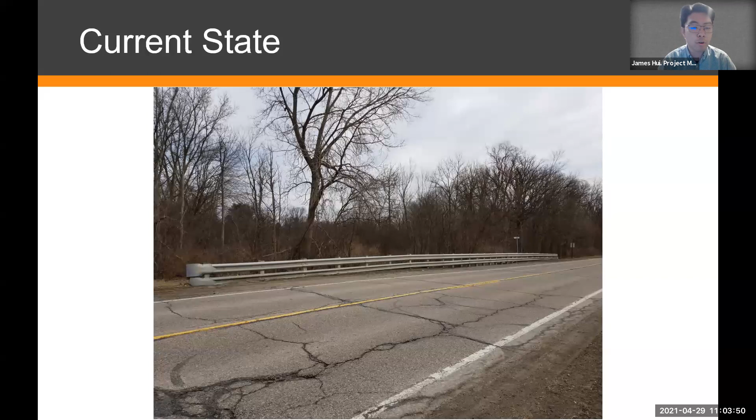Here's a picture of the bridge over Fleming Creek. We will be closing this bridge down for the duration of the project. While we're performing this work, we have some preventative maintenance work that has to be done on the bridge before we pave back over it.

So the plan is to mill and resurface Ford Road between Plymouth Road and M-153. With this resurfacing, the road will be closed, and we'll do minor ditching work to improve drainage. We'll mill the top layer of the existing pavement and pave back about 3.5 inches of asphalt. Our design proposes a 3-foot paved shoulder on each side with 3 feet of gravel.

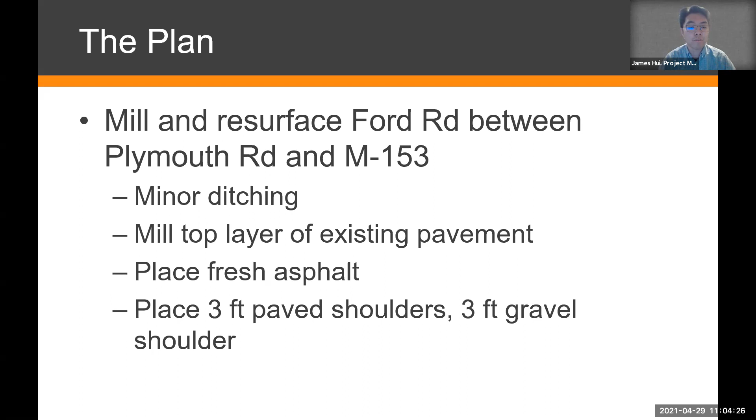There are other improvements we're trying to include during this closure. We're going to trim the tree canopy in the area - we won't be cutting any trees down, but we will limb some branches as time allows. We'll also be doing bridge deck preservation as we mill down to the bridge, installing new guardrail on that bridge, and putting back a fresh new coat of pavement markings on the road once we pave it.

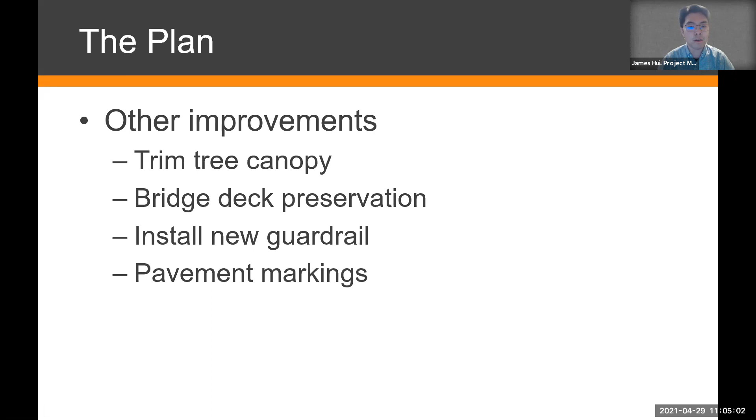I'm sure many of you have seen what milling looks like. Once we're out here, we'll have operations set up to maintain one lane during the milling, so people living in the area will still have access to their property. This is a typical milling machine, and they'll be handling one lane at a time. If you're driving in the area, please watch out for the cones, signs, and workers so everyone stays safe.

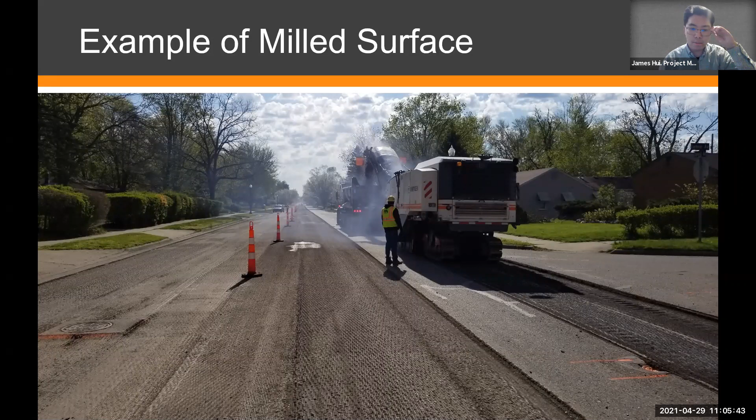Let's talk about our timeline and detour routes. Our contractor is expecting to start this project at the beginning of June. This is tentative because they're currently working on a different project for us, and it depends on when that job ends. Our best estimate is that they'll start June 1st. We'll keep the website updated and send out updates to everyone on our emailing list as the time gets closer.

This road closure is expected to last approximately 2 weeks. This depends on the weather, but we're going to try to hold the contract to 2 weeks at most. Some of this work may be completed under lane restrictions after the road is reopened - once the road is paved and back open, we'll still have pavement marking work, shoulder work, and ditching work that could happen after opening. So just be cautious as you're driving by.

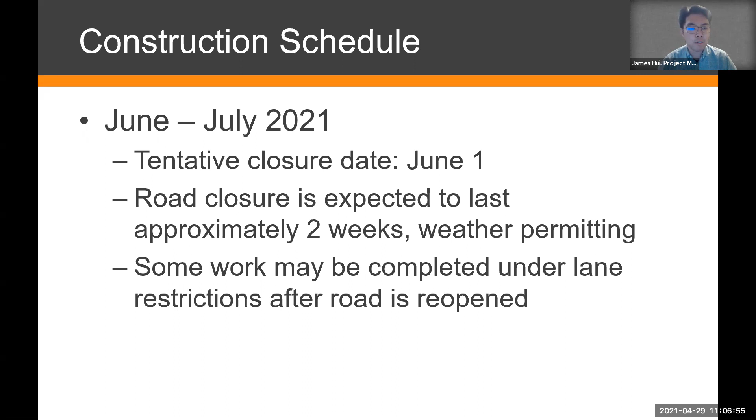Impact to traffic. Ford Road will be closed to through traffic. What this means is that anybody using Ford Road just to get through to Plymouth or to M153 is recommended to not take this portion of Ford Road. They will be advised to take the detour route.

As I mentioned before, anybody that lives or works in this stretch of the road will be able to get in and out. Our contractor has been instructed to make sure to maintain access for all the driveways and approaches to each of these locations on the project.

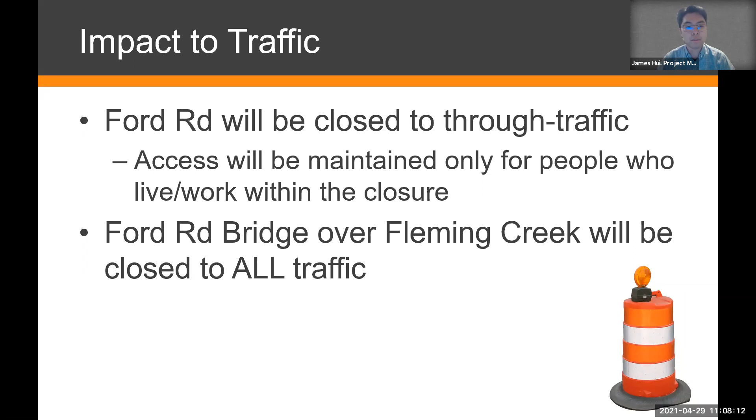But for your information, the Ford Road Bridge will be completely closed to all traffic, meaning no cars can drive on it as they're doing the rehabilitation work. So please be aware, if you need access east of this bridge, come in from M153. If you have driveways or access on the west side, come in from Plymouth Road. This bridge will be closed for a 2-week duration, so please plan ahead for your drive.

Next page. So here's our posted detour. It's a fairly short detour, so hopefully it will be a minor inconvenience for most people driving through here. This will be from M153 to Plymouth, and then from there.

Again, just to mention, the bridge is closed where it's pointed out on the map there. I know we've talked with the neighborhood that lives on Andorra Drive. We recommend that you come in from Cherry Hill if possible during this project. A lot of the other neighborhoods don't have access from a different road, so please come in from either M153 or Plymouth Road, depending on where you are from this bridge.

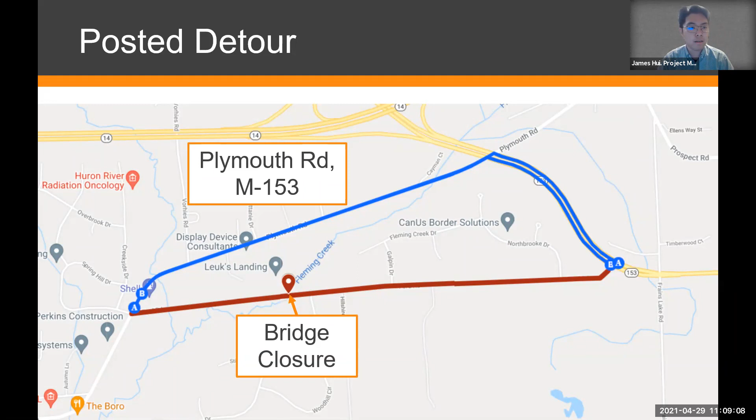Next page. Again, just to reiterate, once the road says it's closed, it's closed. Please don't try to drive through, and please don't try to move our barricades. We've had a lot of instances where people try to take these into their own hands, and they end up getting damage to their cars or have a hard time turning around. It also leads to a lot more harm to our workers on site. So please adhere to these road closed signs and barricades.

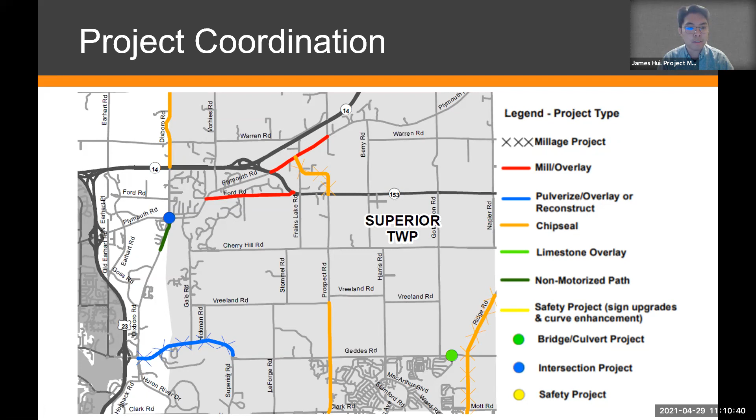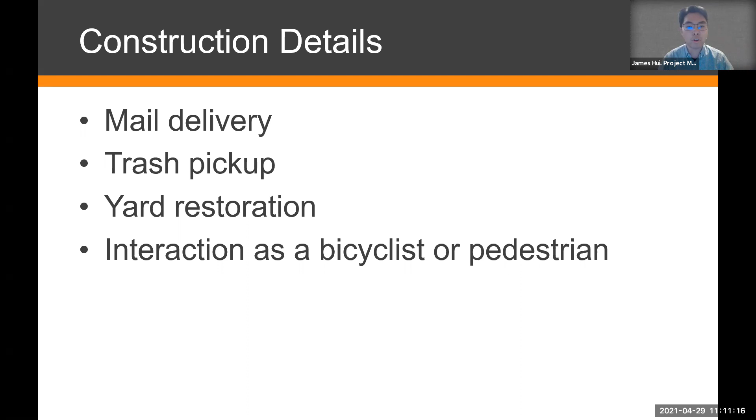Next page. For our minor details: mail delivery and trash pickup will occur as usual. If there are any special needs, please let me know and we can try to figure something out. For yard restoration, any impact we have on your property, we will restore. And for bicyclists or pedestrians, we do advise that you don't take this path during the duration of the project, just for your safety and for our workers as well.